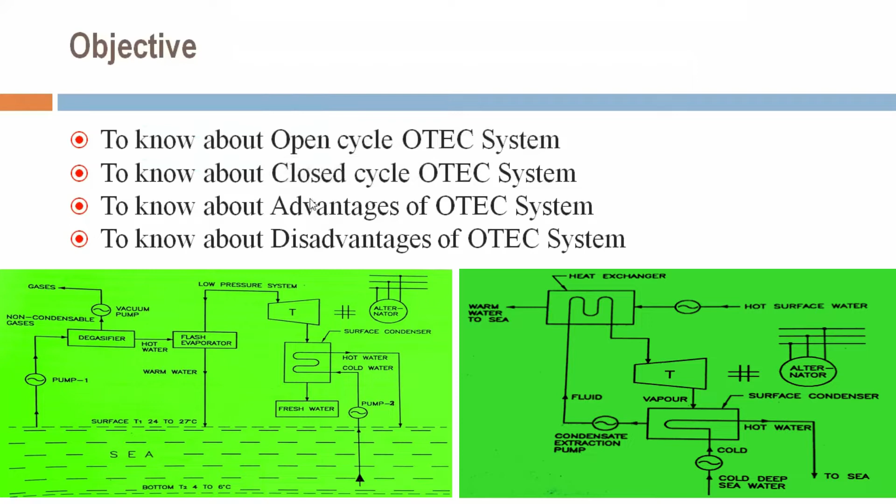The objective of today's lecture is to know about open cycle ocean thermal energy conversion system, and to know about closed cycle ocean thermal energy conversion system. Now, open cycle ocean thermal energy conversion system.

See here, this is the pump 1. It will be connected with this degasifier, and from that vacuum pump is there. Here non-condensable gases is there. Here hot water is going into flash evaporator. Here warm water is there. Here low pressure steam. Here turbine is there. Here we can say that turbine is mechanically coupled with alternator or generator.

Here surface condenser. Inside that, this is the hot water, it is going into sea, and this is the cold water. It is coming from this pump number 2. And fresh water is this. This is the sea. Okay. This is the surface and this is bottom temperature. The elements and their functions of open cycle ocean thermal energy conversion system are as follows.

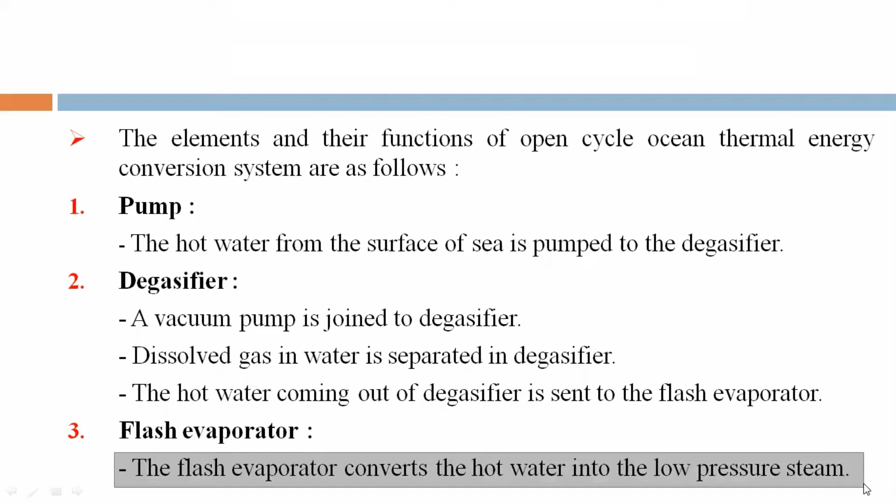Now fourth, steam turbine. Steam coming out of the flash evaporator is taken to the turbine where it is expanded.

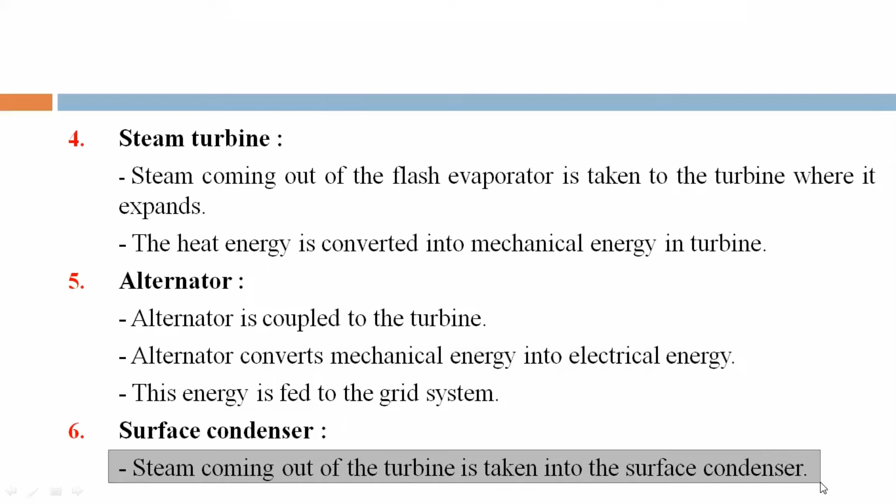A vacuum is produced in its condenser. So the difference in pressure between the inlet steam and the exhaust steam is increased, and this results in increased efficiency.

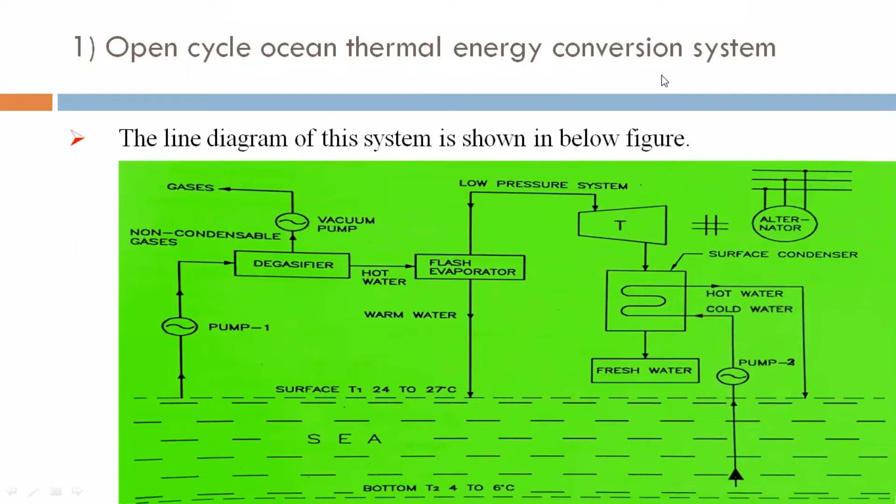See here, this is the surface condenser. Hot water is coming into this, and here this pump 2, and cold water going into surface condenser. So we are discussing regarding these things. The heat of the exhaust steam is absorbed by the cooling water, so the steam gets condensed and gets converted into water.

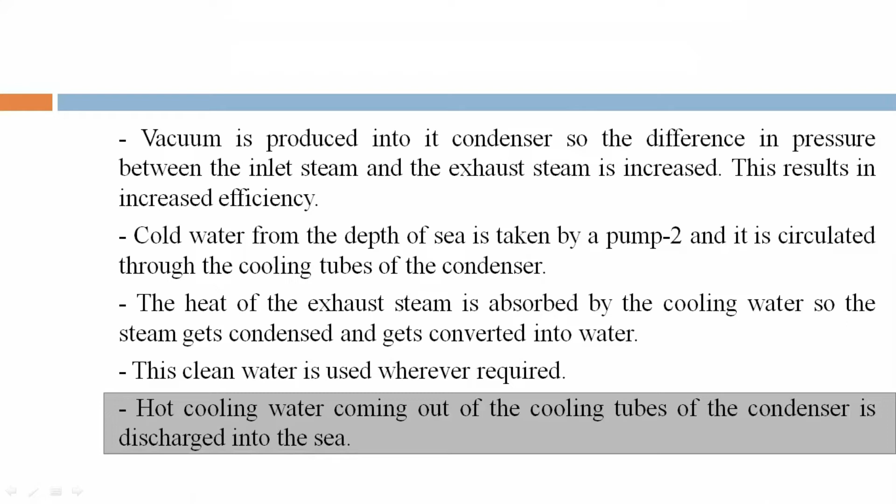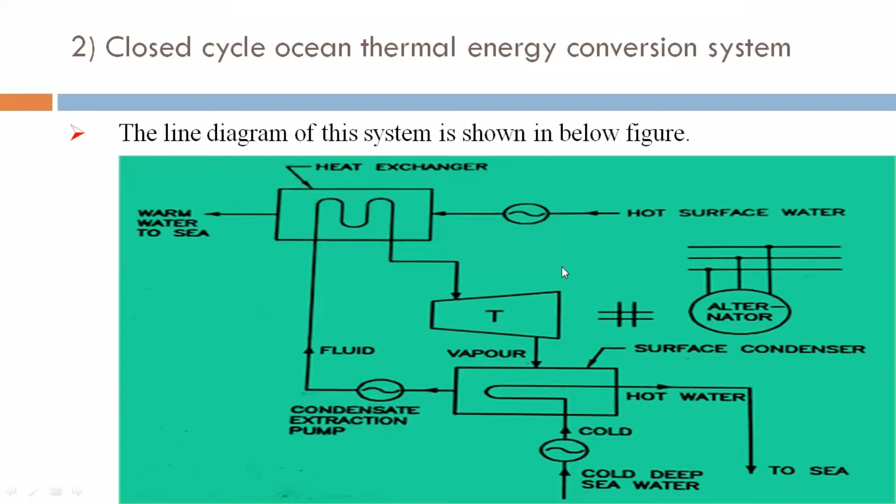Before, we said this hot water, cold water, and it will be going through this pump. Here, the condensate extraction pump. So water is going inside the heat exchanger. In this system, a gas having a low boiling point, for example ammonia, is used as the working fluid and the same circulates in the closed cycle.

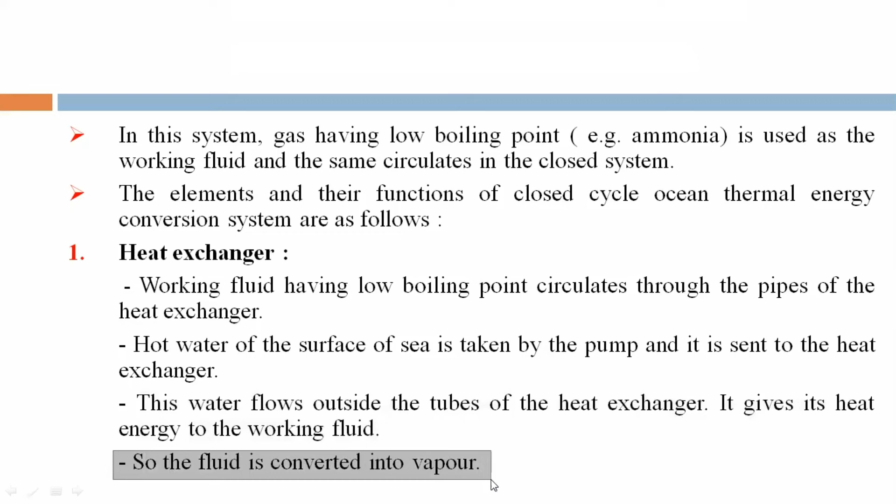Now second, turbine. The vapor is expanded through the turbine, so the heat energy is converted into mechanical energy.

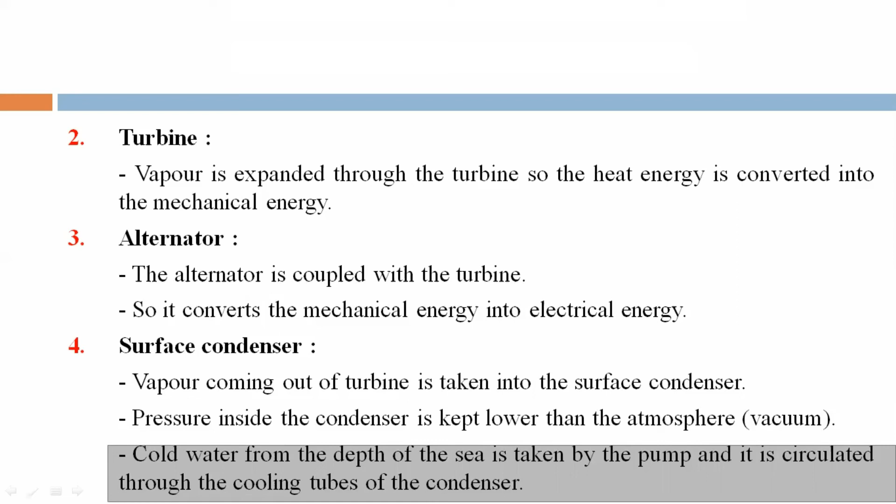This water absorbs heat from the vapor and the vapor is converted into liquid, which is collected at the bottom of the condenser.